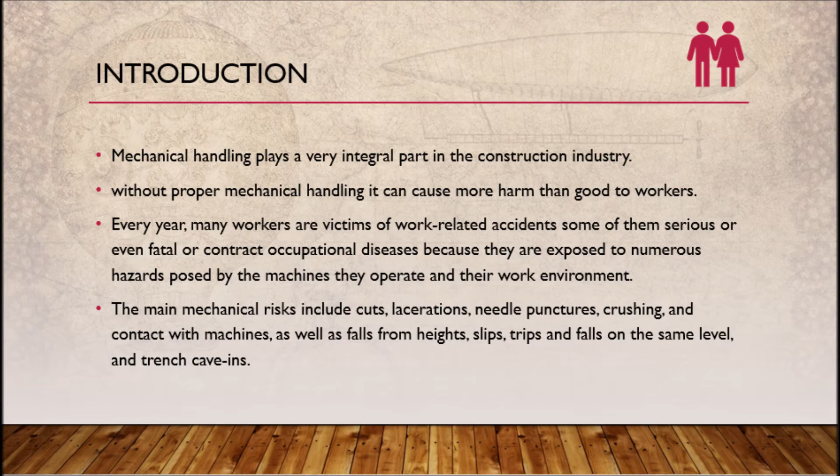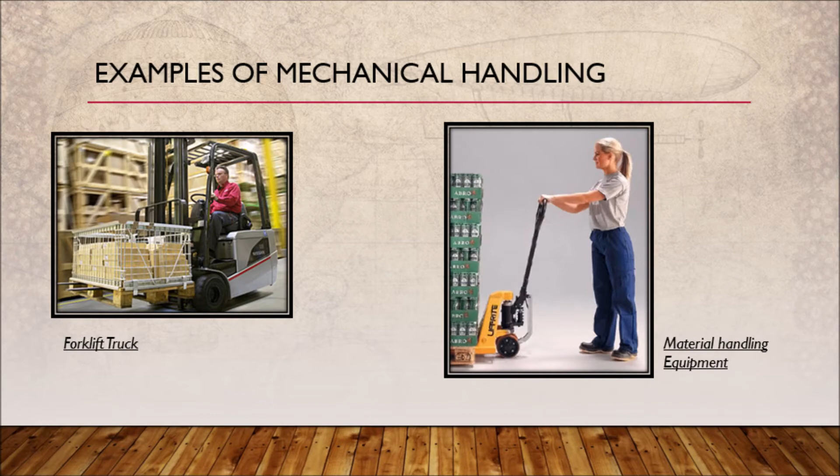Okay, this is an example of mechanical handling. As we can see, the figure shows the forklift and the material handling equipment. Next, this is the mechanical handling device.

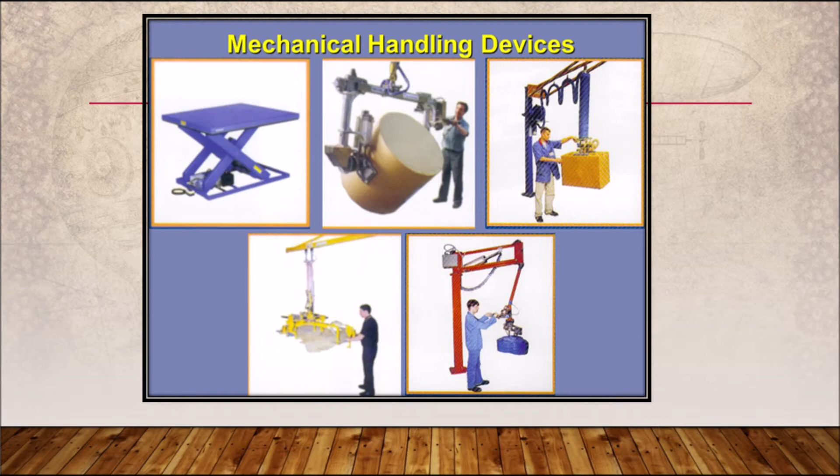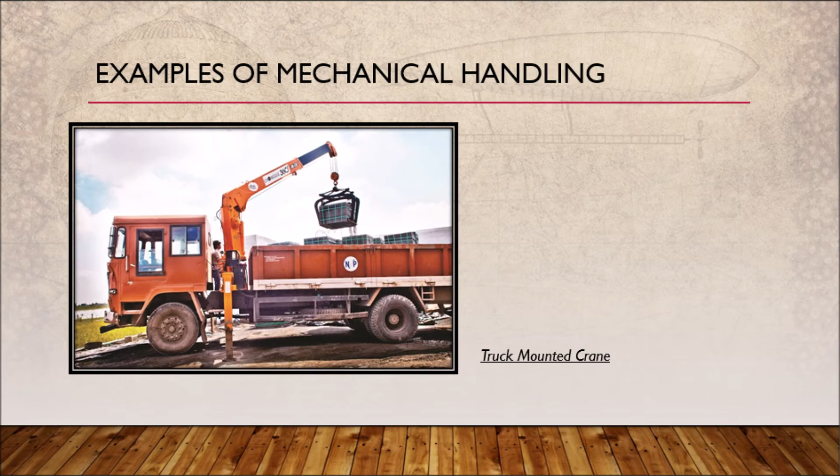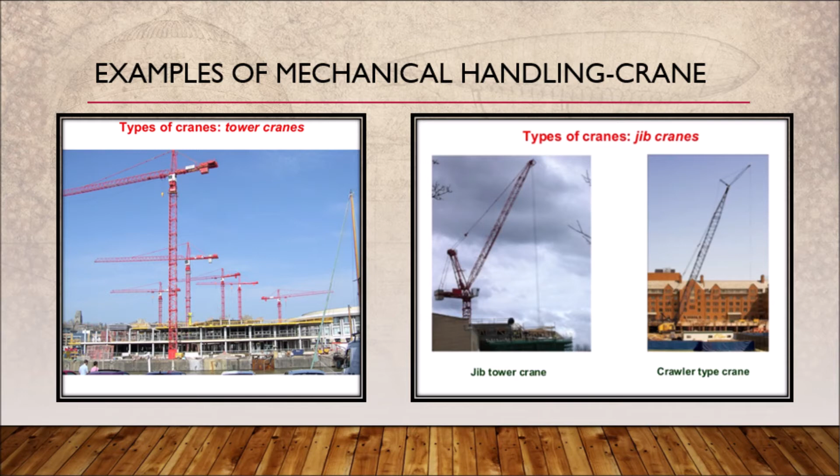Next, an example of mechanical handling: truck mounted crane. There are cranes, and there are two types of cranes: tower cranes and jib cranes. Jib cranes are divided into two: jib tower crane and crawler type cranes. And another one is overhead, or what we call gantry traveling crane.

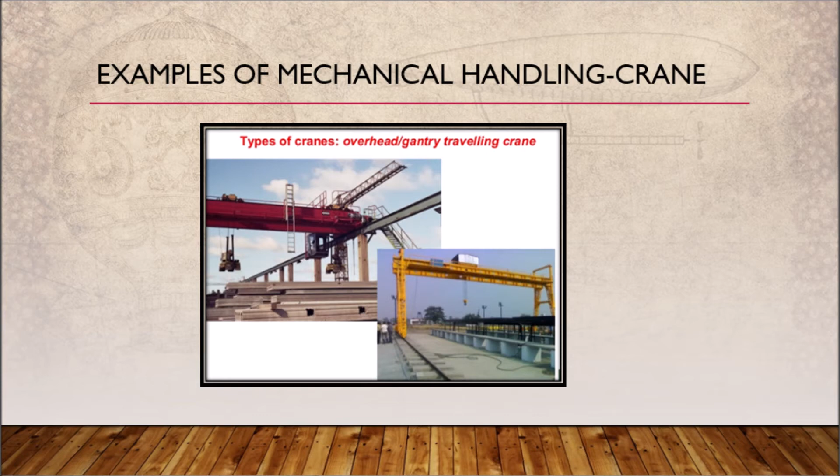Next I will continue to the mechanical handling hazards. There are 4 mechanical handling hazards: first, the mechanical handling equipment; second, the load; third, the workplace; and last, the employees.

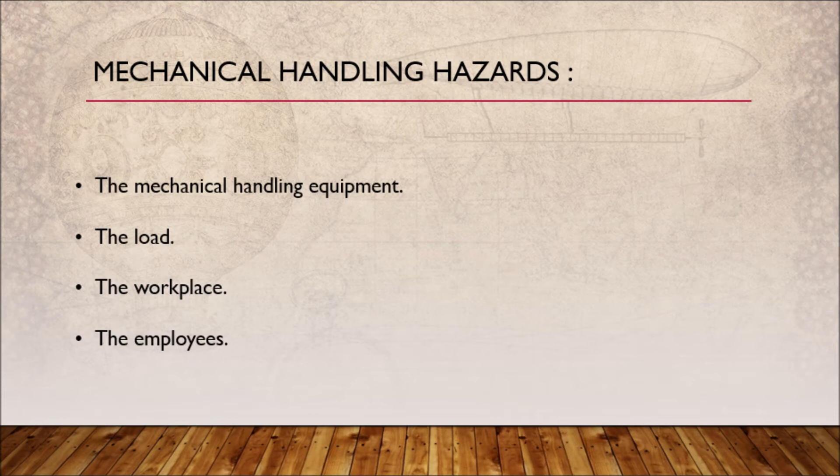I will go to the mechanical handling equipment. What is mechanical handling equipment? It must be capable of lifting and/or moving the load, and must be fault-free, well maintained and inspected on a regular basis. The hazards include collision between people and equipment, and personal injury from being trapped in moving parts of the equipment such as belt and screw conveyors.

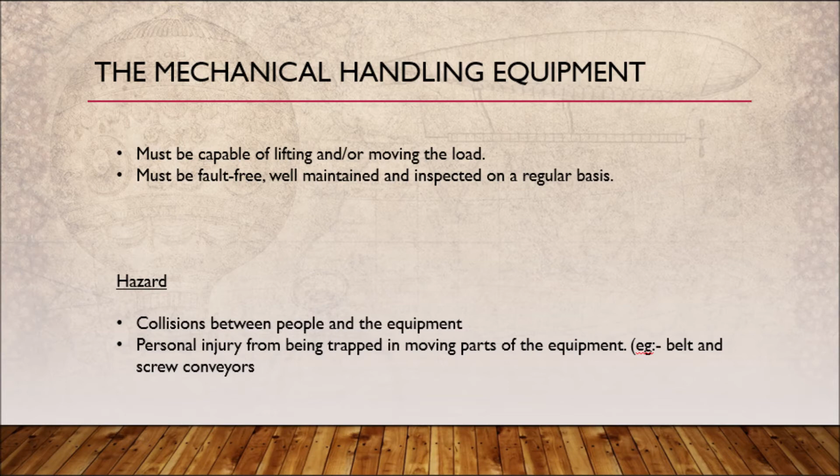Now we go to the load. It should be prepared for transportation in such a way as to minimize the possibility of accidents. The hazards for the load include the nature of the load, such as substances which are flammable or hazardous to health, and the security and stability of the load, such as collapse of a bale or incorrectly stacked pallets. That's all from me, thank you.

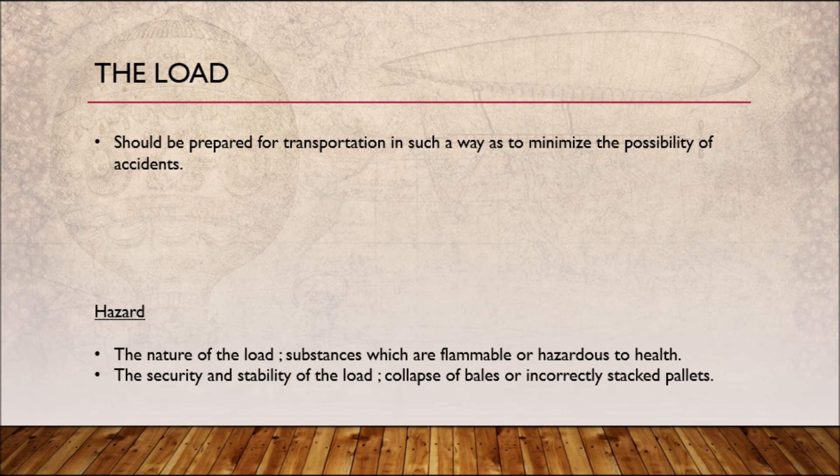I will continue to the mechanical handling hazards for the workplace and the employees. We go to the workplace. It should be designed so that, whenever possible, workers and the load are kept apart. The hazard for the workplace is collision between people and the moving load.

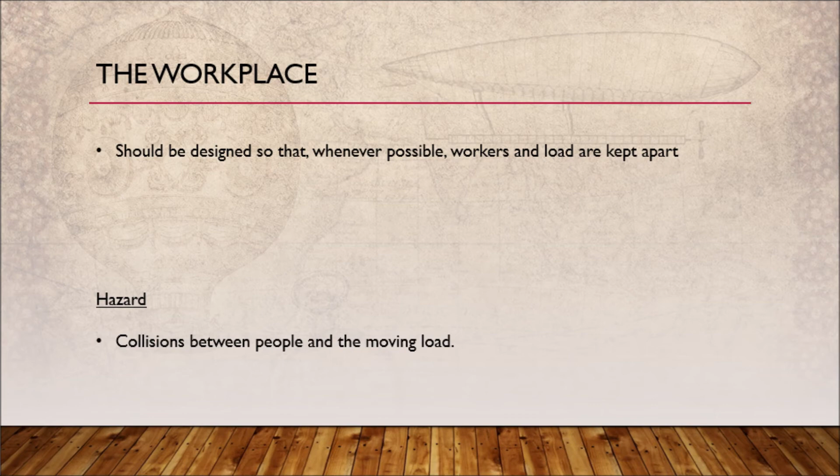Now we go to the employees, the last mechanical handling hazard. The employees and any other people who use the equipment must be properly trained and competent in its safe use. The hazard for employees is errors made by operators causing accidents involving mechanical handling equipment. That's all for the mechanical handling hazards.

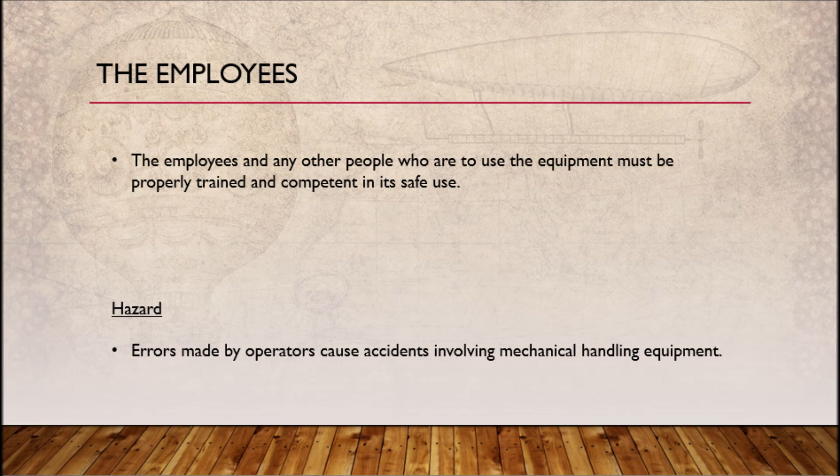Next we go to the control measures. There are 5 control measures: first, identification and testing; maintenance; safety measures; operating areas; and operating training.

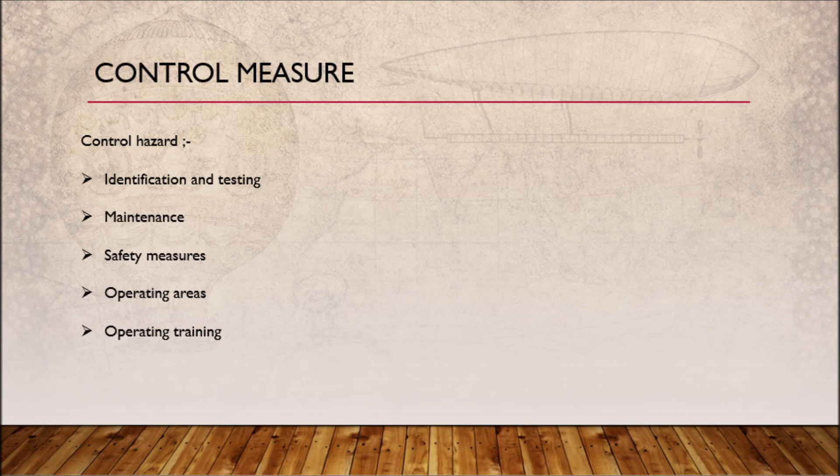First, for identification and testing: every machine should be tested and a certificate should be issued, with the safe working load clearly marked.

Second, maintenance: machines should be inspected regularly with any fault repaired immediately, and records of inspection should be kept.

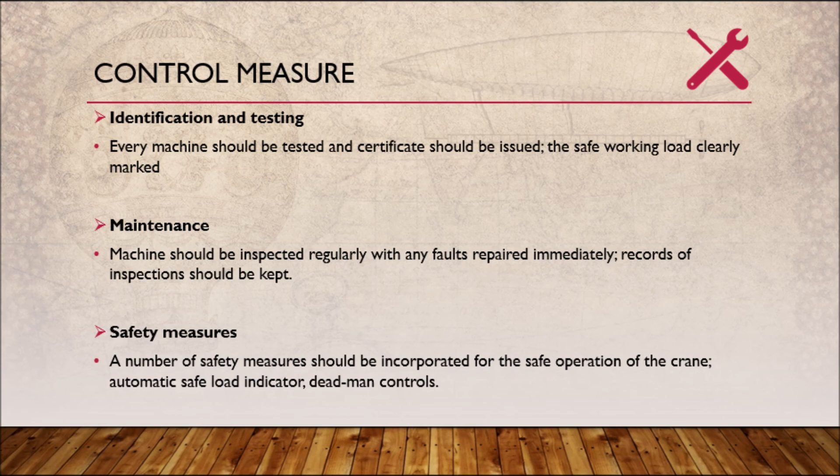Third, safety measures: a number of safety measures should be incorporated for the safe operation of the crane, such as an automatic safe load indicator, deadman control, and other mechanisms.

Fourth, operating area: all nearby hazards, including overhead cables and bare power supply conductors, should be identified and removed or rerouted. Solid support should be available, and the possibility of striking other cranes and structures should be examined.

Fifth and last, operating training: machine operators and slingers should be fit and strong enough for the work, and training should be provided for the safe operation of the particular equipment.